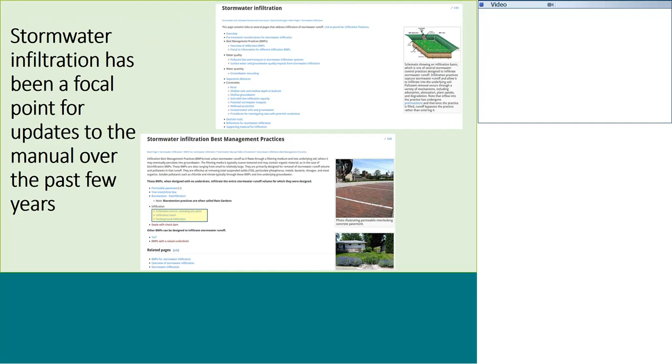There's also a page in the lower part of the screen called Stormwater Infiltration Best Management Practices, and it's the area shaded in yellow that we're going to primarily be focusing on today, and that would be infiltration trenches, basins, and underground infiltration. So we executed a work order. Got to do two things here at one time.

We executed a work order with Barr Engineering to do the following: to provide new information and update existing information on infiltration practices in the manual, with a focus on infiltration basins, infiltration trenches, underground infiltration, and dry wells. This information had not been updated in the manual since the original manual written in 2005. And to ensure consistency between all infiltration best management practices, not just these, but also bioinfiltration, permeable pavement, and so forth.

As I mentioned, our contractor was Barr Engineering. Greg Wilson was their project manager. The top 4 people, Greg, Matt, Michelle, and Heather, did most of the heavy lifting on this, but Barr brought in a lot of people to help at various points in this, and we really appreciate their efforts and work on this.

I'd like to thank our technical support team. With many of our larger projects for the manual, we put together technical support teams. These are people who volunteer their time to review documents, to meet when we have an occasional meeting, and discuss the material as it's being developed. Lois Eberhardt, Jim Hafner, Mike Eisenseat, Karen Jensen, and I believe Joe Mulcahy also pitched in from Met Council. Forrest Kelly, Randy Neprash, and we'd like to thank again those people for supporting this effort.

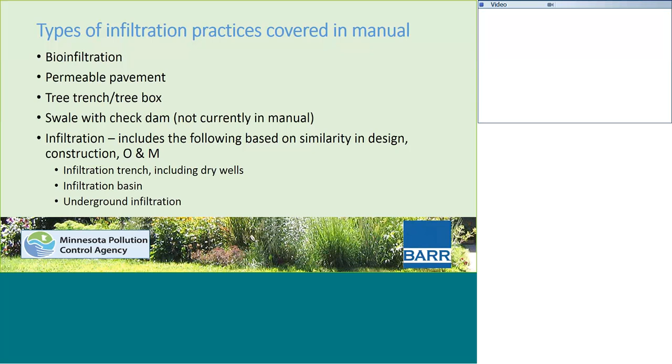As Mike talked about here, we've got infiltration and bioinfiltration. I think there's some things that were brought into this version of the manual that are kind of distinguishing biofiltration practices, those practices that don't infiltrate, from the infiltration measures. And I think I know you wanted to say a couple words about those exceptions.

I just wanted to mention that the bioretention page was updated about 3 years ago with work done by the Kestrel design group, and that page is in pretty good shape, and it was used to kind of help guide us on the infiltration work, which we've really been focusing on since then. So this page has actually been out there for quite a while, but it's the infiltration stuff that we're really focused on with this work order.

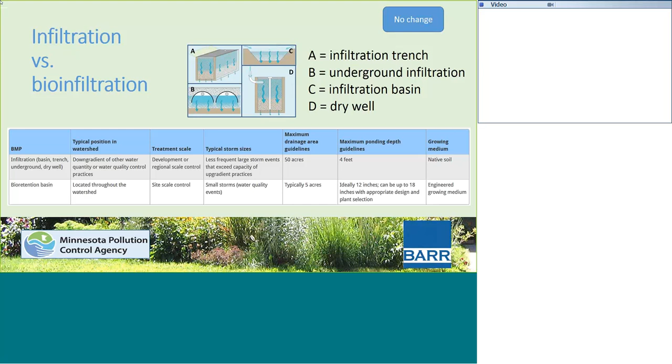Thanks, Mike. I think the other thing to recognize is we have a couple of schematics here in this slide, A, B, C, and D, and what tends to happen with the sections of the manual is that these are utilized consistently to try to provide a visual for how these look different. Okay, and so that is another way to guide your navigation around on the pages on the website. So I think with that, I'll move to the next slide here.

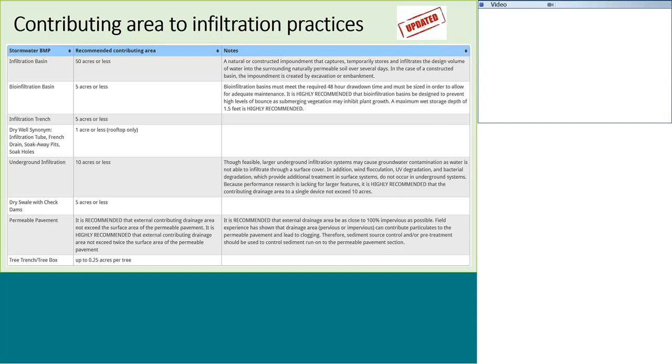If I could just make a quick point here. You'll notice that the contributing areas are all in acres except for tree trenches and tree boxes, and the reason being that we're talking about a tree which needs a certain space to grow in, and so that contributing area is based on the area that tree needs to grow and become healthy and effective. Thanks, Mike. Move on to the next slide here.

Another design element that's taken into account for each of these practices is site location or minimum setbacks. And so we've got different features here vertically or horizontally, whether you're looking at the distance from the high water level, groundwater level, saturated soil, wanting to be 3 feet or more above that, or bedrock. And then also horizontally, how far away you are from a structure. There's some guidance in there for that, 10 feet in this example here, as well as sensitive wells and surface water features, septic systems, slope and karst features.

And so for each one of these elements, in some cases they are footnoted to try to provide more detail deeper in the guidance, and some of these terms are defined as well. One thing that we did revisit, in talking to our technical team, as well as feedback that Mike was receiving prior to work on this study, was that in the past the manual had defined the term bounce. It also provided a definition for water quality volume, and that D-naught term that's in this figure here.

But what our stakeholders were telling us was about the drawdown depth, which is not a defined term, and we did define it here. What we tended to see is the outlet, or the control for any one of these features, a lot of times was creating a lot of extra bounce. And so as a result, it might take a long time for the drawdown depth to get drawn down in like a 48-hour time frame. If that was what was desired in the past, a lot of folks using this guidance were designing things in such a way that the water quality volume would be depleted within 48 hours.

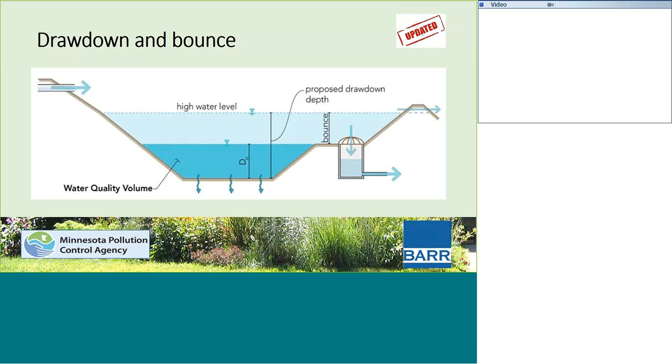And what we heard was that our stakeholders preferred that the entire feature be drawn down within 48 hours, so that if somebody did have pretty high bounce in their feature, you would still have a dry basin within the desired time frame. So this figure is in the guidance and is intended to provide some more background on what's intended when we go in and, for different soil types, define what we think the infiltration rates should be, or in this case the drawdown depth that needs to correspond with that 48-hour time frame.

Greg, if I could just make a point here, I hate to back up, but in the previous slide, it was mentioned about getting the full volume of water out of that system. I should mention that that is a permit requirement. So, great. Thank you, Mike.

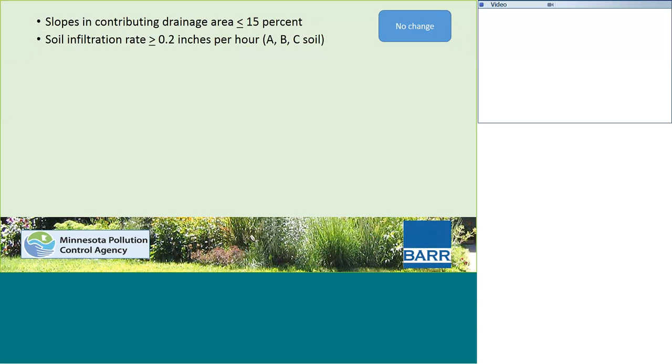So then the other thing is having infiltration systems that do not have an underdrain. If you have an underdrain, then we're really talking more about a filtration practice. Pre-treatment, there is short guidance on what to assume for that. I think this will be a future topic for Mike's group. And yeah, I'm not sure if we're going to make it a topic, but it might be part of a webinar. But the pre-treatment section in the manual has also been updated, and so I would recommend that you go to that section in the manual.

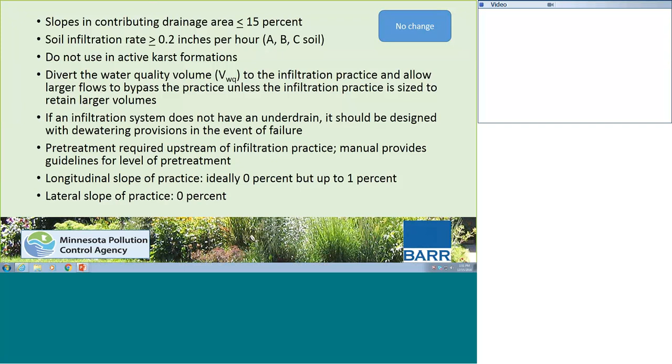I think I'm off the... Okay. I'm going to bring this up.

What we have is a graphic on the left-hand side. Don't expect anybody to see this, but this has been revisited as well. Mike's group through the Minnesota Department of Health have updated the stormwater guidance for sites with drinking water supply management areas. And so this kind of gets at that wellhead protection side of the infiltration practices and what to consider in that regard.

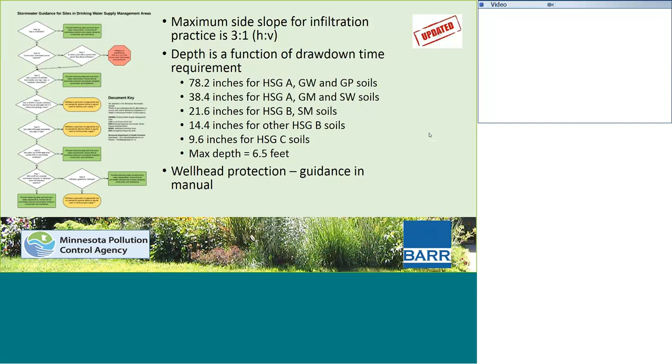I talked earlier about the drawdown time. So we've got maximum side slope practice slope guidance here, but then we also have this individual guidance based on soil type for drawdown time requirements, with the intent being that we wouldn't have a practice that's more than 6.5 feet deep, so that we can make sure it does drain dry. Like Mike said, it's a permit requirement. But if you've got other soils, then the drawdown time requirement is going to affect how deep the maximum depths can be for the various soil types. So that's been updated in this version of the manual.

We also have more information about landscaping and integrating vegetated areas into the planning process, what's recommended for that, selecting vegetation based on their tolerance to water, native plant species and highlighting the preference for that, what types of other vegetation you should consider in these practices, and keeping woody vegetation out of pretreatment devices to not hamper the maintenance of those. Discussion about planting trees along the perimeter and not over underdrains is highlighted, and then using salt-resistant vegetation if necessary.

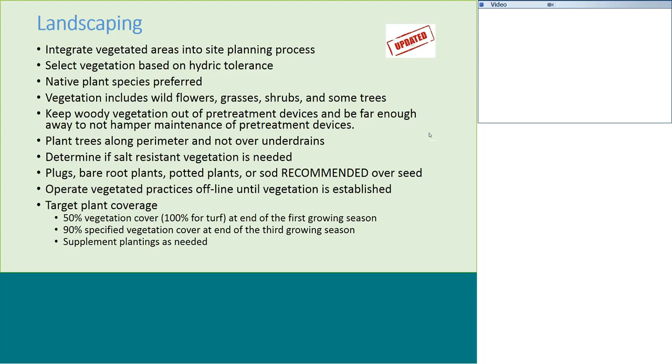So we've got other information that's recommended for plugs, bare root plants, potted plants, or sod. And then operating vegetated practices offline until vegetation is established. There's guidance on that. And then how much plant coverage you should have within different time frames after these practices have been constructed.

Greg, could you just touch real briefly? We get this question a lot on whether snow can be put into these best management practices. Can you maybe just comment a little bit on that and why you're saying rain gardens should not be used for that purpose? Yeah, I think the concern is similar to why we don't want to store much higher levels of water for longer periods of time, in that we're getting more compaction of the soils if we do a lot of snow storage in the practice, or if we have excessive water storage in these practices, and that appears to be affecting the long-term success of some of these practices through compaction.

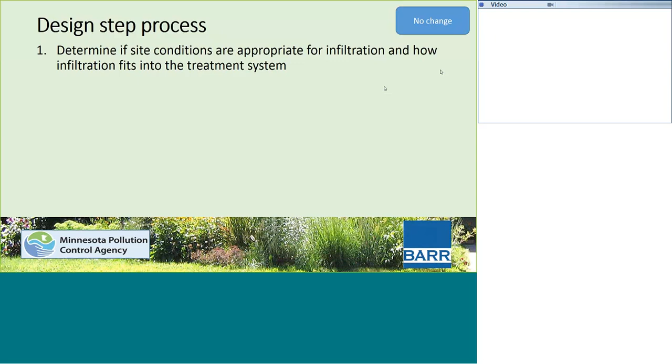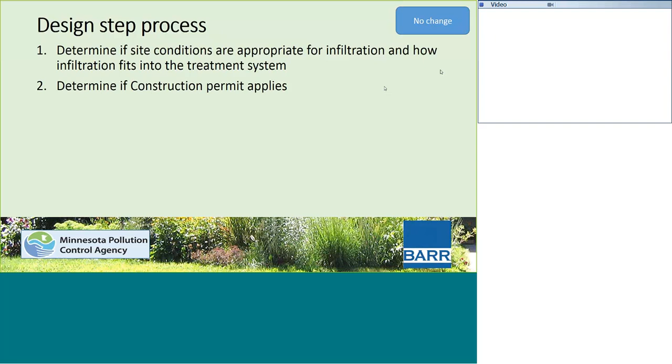All right. Well, I'll try to continue here. Our design step process tries to get people thinking about their site conditions, whether or not it's appropriate in the first place for infiltration, and how that might fit into your treatment system if you've got a treatment train essentially. Determine if you are subject to the construction permit requirements and what might apply from an infiltration practice standpoint. And then verifying your soil properties.

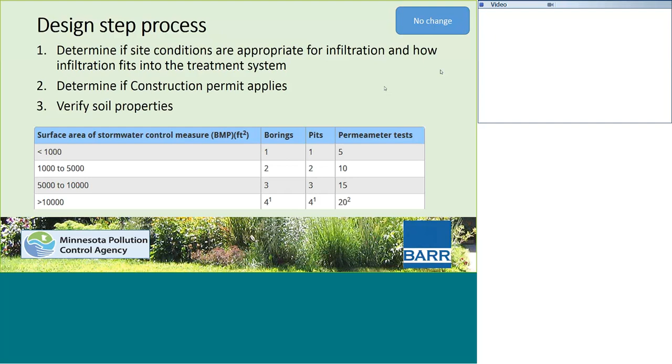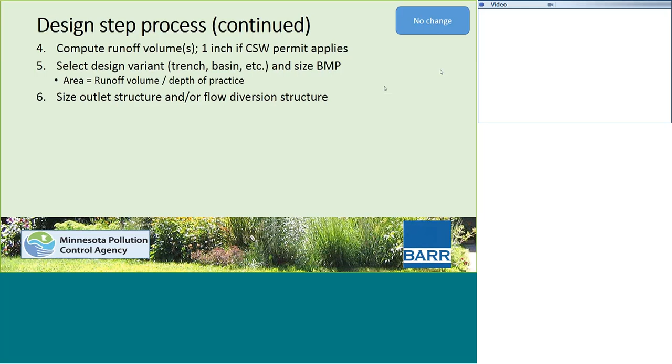The fourth step was to compute runoff volumes, determine if the 1-inch construction stormwater permit applies. Selecting your design variant, what practice are you using and how to size that. Look at your area, your runoff volume and depth that you can maintain or that you can support. How you're going to size your outlet and flow diversion structure so that you can meet that drawdown time that we talked about earlier. And then performing groundwater mounding analysis.

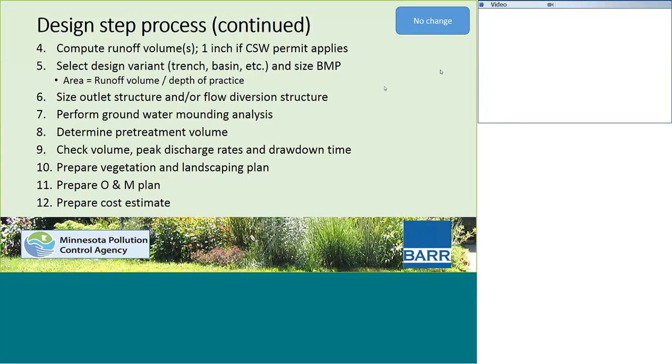I know mounding you were going to talk about later, Mike, as well. There's some more guidance on doing this analysis in the manual, and you might step through that. Yep, I'll talk about that in a later slide. Thanks. And then determining what your pretreatment volume should be is the next step. And checking your volume, peak discharge rates and your drawdown time. Making sure you're within guidelines on that. Preparing your vegetation and landscaping plan and your operation and maintenance plan. And then obviously looking at your costs, depending on where you are in the design process.

Construction specifications was a new element of the manual this year. Try to get more guidance in there about access agreements and adding sections that define easements that might be required, that get you considering what's required in the way of access agreements. Specifications, revisited the construction specifications. Like I talked about earlier, making sure we're getting links to MnDOT specifications wherever possible.

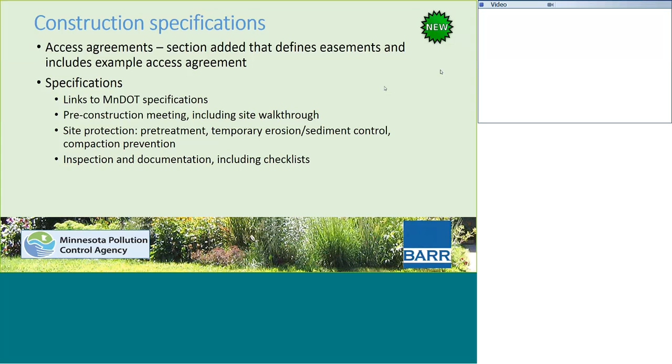Getting you thinking about pre-construction meetings and walkthroughs when you actually do start to construct the practice, and those other things that you need to consider along the way as to the timing of protecting the site, getting your pretreatment in there, your erosion control, and then making sure that the contractor avoids compaction of the practice as much as possible. Inspection and documentation, we include checklists for each type of practice. There's individual checklists for each type of practice to give you guidance on what to look for as you inspect and document the construction of the practice.

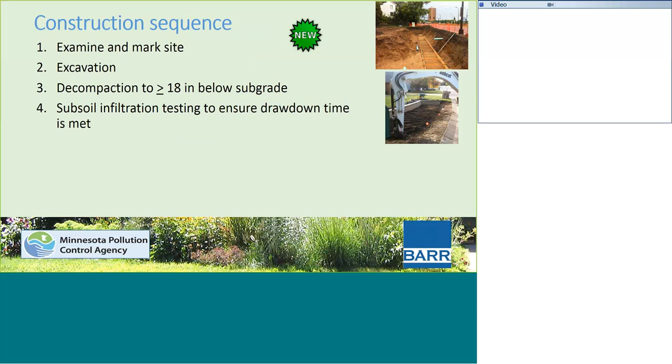New this year is getting construction sequence information in there about examining and marking your site and laying it out before you start construction. What to follow and best practices for excavation and decompaction if you need it, if you do tests and determine that you need that. Things that you can do to do that down to an 18-inch depth below your subgrade. Subsoil infiltration testing to ensure that your drawdown time is met. And then the installation of the materials and media. Best practices for that and restoration and planting, as well as what guidance you might want to consider for stabilizing and closing out your project.

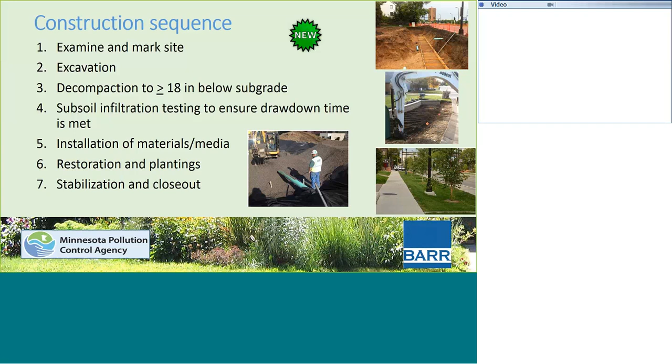So here our next step in the process of updating the manual material is to consider the design and construction phase considerations. Maintenance burden: we've determined that the maintenance burden can be minimized by considering these design criteria. Limiting that drainage area to the BMP, like I said, that varies depending on which practice you're talking about. Providing the site access that you know you're going to need in the future, as well as pretreatment, and then what kinds of native plantings to utilize.

And then inspections during the construction process to ensure that your infiltration practices are built with the approved standards and specifications.

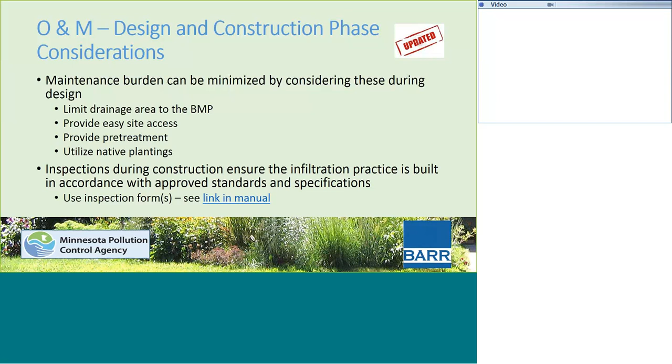Should we go to the link in the manual for that, I guess? On here? Yeah, go ahead and give it a shot. That's what you want, right?

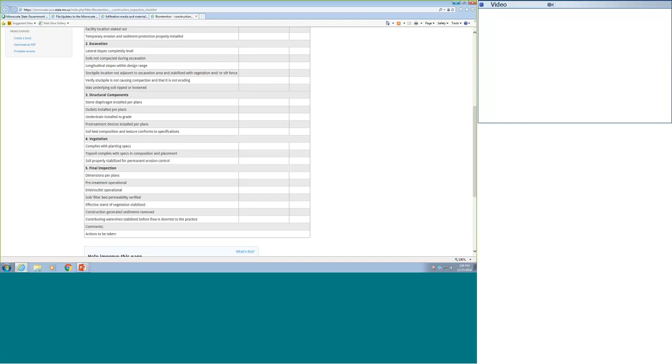What structural components you want to document, as well as the vegetation and making sure that you're meeting specifications on that, as well as the final inspection and closeout of any given project.

And we've got post-construction operation and maintenance considerations. So these have been updated as well in the manual, and revised maintenance plans now include inspection and maintenance checklists, operating instructions for the outlet component, and then your maintenance schedule for vegetation. We have also provided some examples of legally binding and enforceable maintenance agreements. I think we had at least 3 of those in the manual from different entities here in the area that have a lot more experience with these practices.

What's important in these agreements? So there's a few examples to consider in there. And then making sure that you have adequate access and are avoiding compaction, and like we talked about earlier, snow management, those considerations are highlighted, as well as maintenance activities in your schedule. You've seen that before, though, right? So the typical maintenance regime has been updated.

If vegetated, we know you're going to want to water the plants for the first year after planting. And then as needed, consider weeding and pruning the vegetation, stabilizing your mulch and vegetation, removing trash and debris, and then mowing any filter strips that you might have. On a semi-annual basis, it's suggested that you inspect the inflow, pretreatment systems and filter strip, as well as removing or replacing vegetation as needed. The manual provides more guidance on each of these, and includes some estimate for hours in performing these activities, so you can plan out some of these other factors in advance.

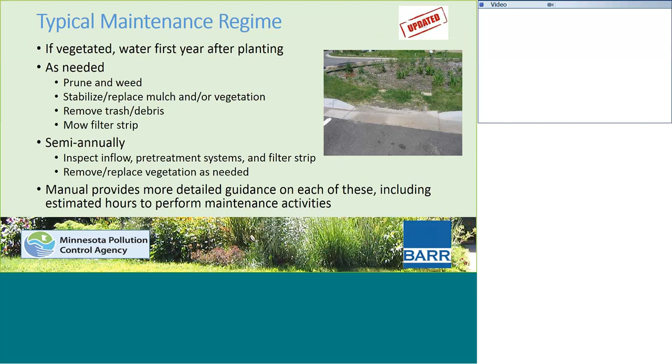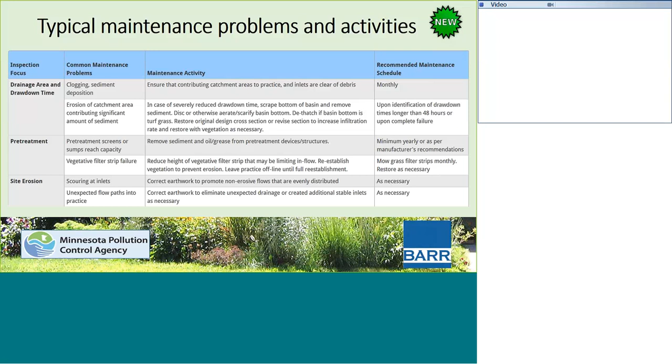So some of the typical maintenance problems have been documented in this version of the manual. This is new information. Depending on what your focus is, whether it's the drawdown time or the drainage area, we've got different maintenance problems that could come up, and so we categorized it by that. Or if you're looking at the pre-treatment portion of the system, or even site erosion following construction, what are the maintenance activities? We've got these individual maintenance activities for you to consider, as well as what that schedule might be for each one. So suggestions on how often to consider each maintenance activity are included in the manual now.

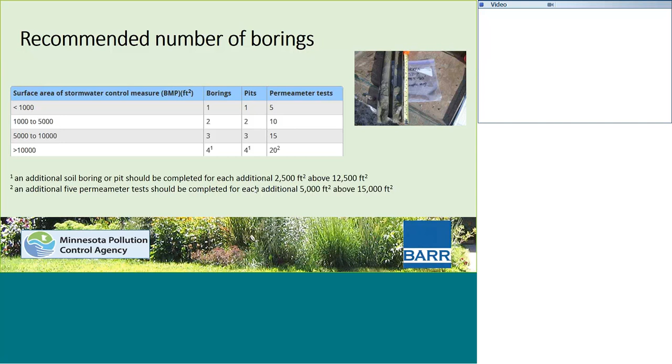Okay. Greg showed this earlier, and I'm not going to spend too much time on it, except that there are a couple footnotes that didn't show up in Greg's table that he showed earlier. That as you do increase the size, there are additional recommendations for the number of borings and pits. So for every additional 2,500 square feet of size, we recommend one additional boring or pit, or an additional 5 permeameter tests for each additional 5,000 square feet above 15,000 square feet. Should also mention that we do prefer in situ permeameter tests to borings, but we realize that borings are typically the mechanism that people use to evaluate their soils.

There are different types, and I'm not going to talk too much about this, but I'll go right to the table, I think. There's one question that just came in about this. All right. So a question came in just now about this topic that Mike's talking about. Is there an example scope of work that would describe what a boring consultant is to gather the required documentation necessary for design of a SWPPP?

Well, for design of a SWPPP, I'm not sure that there is anything for that specifically, but there is definitely guidance in there for the types of information that we believe you will want to collect from your soil boring. So there's actually example boring logs in the guidance, and the kinds of information that you want to collect are included; there's a breakdown of that for each type of boring. Yeah, and we'll walk through that here in the next few slides, and hopefully that answers the question. But there is a tremendous amount of information now that's in the manual on this particular topic, and I think it addresses the question. So we can illustrate that later.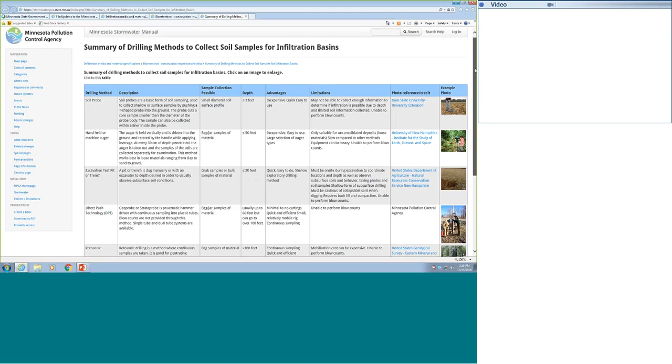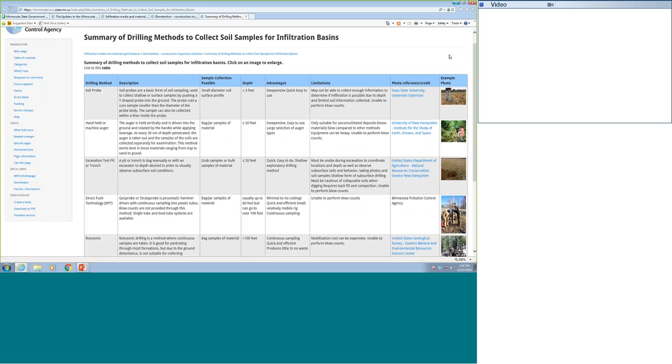There we go. So this discusses the 6 methods for collecting soil samples, soil probes, handheld augers, and so forth, test pits. And this table will give a description of each of those methods. It'll tell you the type of sample collection that's possible, the maximum depth that you can get to using that particular method. So for example, you can't go below 3 feet or 5 feet? 3 feet. 3 feet, I'm getting old. I can't see the screen too well, but 3 feet with a soil probe. I've actually collected soil probes down to 4 or 5 feet when I was much, much younger, and it's not much fun. But yeah, you are pretty limited with that particular method. Advantages and limitations of each method, and then some photos and references that you can go to for further information. So, yeah, if we can go back to the presentation.

Disturbed versus undisturbed soil samples. A disturbed sample does not retain the in-situ structure of the soil. These tests can be used for classification tests. And I talked to Greg about this before, and one of the points that doesn't show up here is that split spoon samples are probably the best methodology for collecting a sample that will give the most relevant information for determining soil suitability for an infiltration BMP, because you can get good blow count information. Correct me if I'm wrong here, Greg. But you use that blow count information to help identify restrictive layers, which is what you're most interested in doing these infiltration tests.

Undisturbed samples are recovered completely intact, and this gives an example of some of the samplers that you can use to get undisturbed samples. They're generally not collected when trying to determine infiltration potential because they do not allow for blow count information, which helps you identify those restrictive layers in the soil.

There's another question that came in. What is the general thought of infiltration in areas that are in active karst features, less than 50 feet of soil cover, but not located in the DWSMA or wellhead protection area? I've heard the term higher engineering review to determine if infiltration can be done in karst areas, but what does the higher engineering review actually consist of?

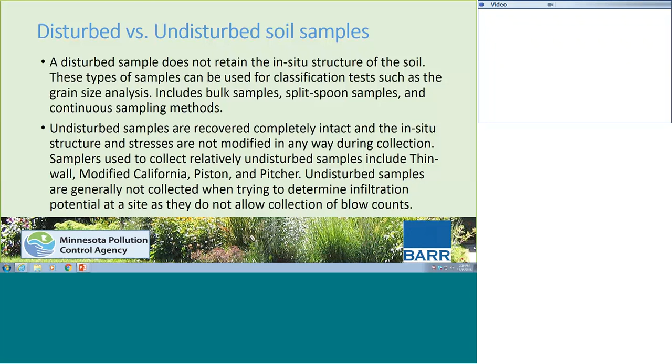All right. Drilling guidance. This is a long slide with a lot of bullets and small text. I apologize for that. But again, we think this is a pretty important topic because your infiltration system is going to perform only as well as the information that you use to design it in the first place. So collecting good soil information is critical.

If recovery in a split spoon sample is less than 6 inches, drill 2 feet deeper and perform another split spoon sample. If a confining layer is found or there is low recovery in a split spoon, reduce your sampling intervals to every 2 feet. What we're trying to do is really characterize that restrictive layer, because that's going to be the dominant layer affecting your infiltration.

If low recovery is encountered, explain this in the field notes and explain why the driller thinks it's happening. Sometimes you can't avoid low recovery, but you need to know that you're getting low recovery if that's the case. Blow counts found using a standard penetration test are critical to determining the presence of restrictive layers.

If soil boring auger refusal is encountered prior to the depth desired, offset about 5 feet from the borehole, drill down to the refusal depth and continue drilling from that point. This will increase your costs, but again, this information is very important. If you continue to get refusal, talk to an engineer. Don't talk to me. Talk to an engineer and try to figure out what's going on, and at a minimum, describe that in your field notes and in the boring log.

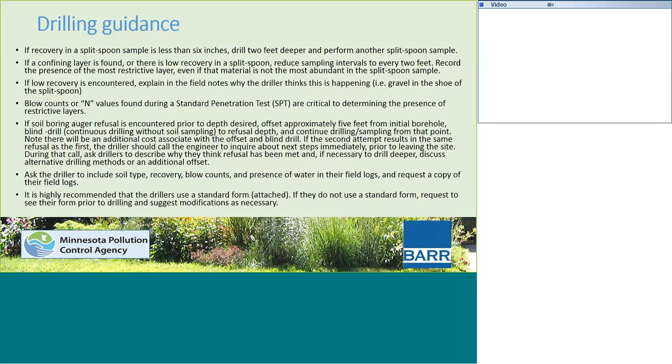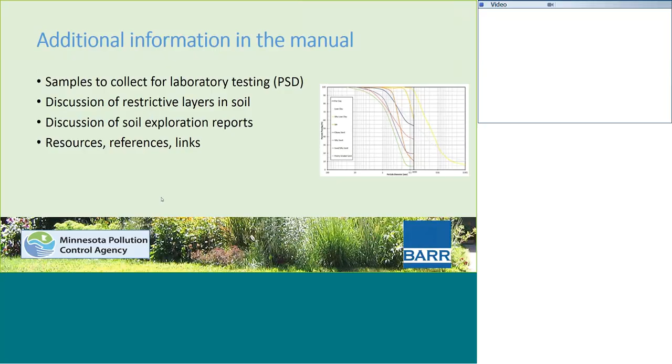Yeah. Greg had mentioned we now have a full page in the manual on groundwater mounding. If you're in the manual and you hover up in the upper right, you see page contents. That will show you the table of contents for that page. Mounding has always been in the manual since the original manual. It's been recommended that you do a mounding analysis. I've talked to some of our engineers here, and they almost never see this actually done.

In practice, it's pretty easy to do a mounding analysis, and this page would be a very useful tool for you if you haven't done them before. The USGS has put together a very simple spreadsheet in Excel format that's accessible, and the link is on this page here that you can use to conduct a mounding analysis. This page will tell you when groundwater mounding is a problem.

So for those of you who aren't familiar with groundwater mounding, when you infiltrate water, you're going to raise the height of the water directly below that infiltration system temporarily until it disperses laterally within the underlying groundwater or soil system. And so that's the mound that's developing underneath.

When should you do a mounding analysis? How to predict the extent of the mound, that's the USGS tool I alluded to. A guide to using that calculator with some examples and various different scenarios and some actual case studies. So the mounding information in this is very useful, and we really recommend that folks start doing that when possible.

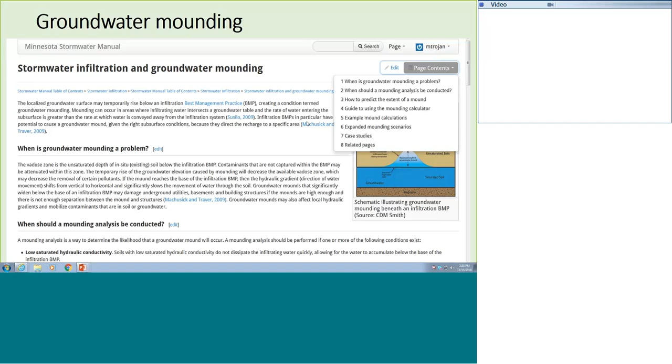Another page that was added to the manual, so I'm kind of done with the boring stuff now. People would say I'm always boring, but

So if we can go back then quickly. We're always looking for good case studies. If you have some, please contact us and we can discuss them with you. We'd like to get more case studies, and we're always looking for good photos too, of stormwater management practices, that is. We're not looking for photos of individuals. So send them to us, good photos with the proper crediting for the photo.

So I think with that, it might be a good time to answer another question. In the chat box: does the manual address infiltration in D-soils as required by several watershed districts? As Greg showed in one of his bullets earlier, infiltration is generally not recommended in D-soils. Is that correct? It is not, but there is guidance that gets at that. I think they have a place for it in one of the bullets there. But yeah, it definitely is not normally recommended.

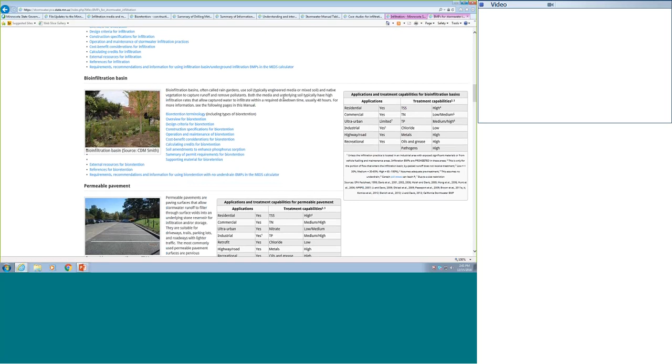But if you went to any one of those BMPs, there's a short description of it, links to all the information, the other pages on that topic. So for infiltration basin, you can get to the overview, design, construction, O&M, and then a table over here that shows you its applicability and its treatment capabilities. And so that would be the case for every one of these infiltration best management practices, the same type of information. Bioinfiltration, for example, same type of table, but different, I'm sure, than the other practices.

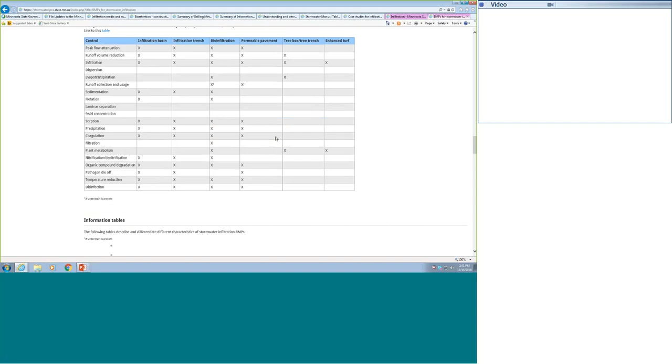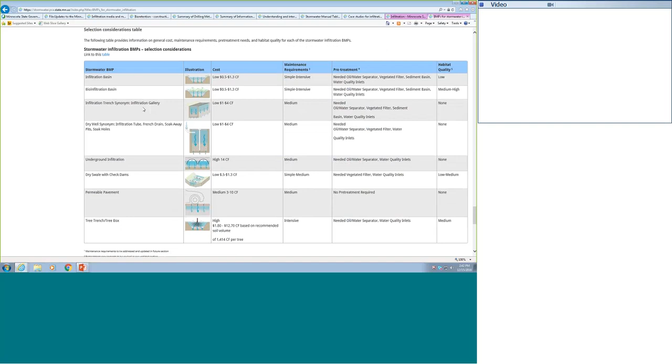You scroll down to some of the information tables. Now, this is the stuff that Greg showed today in the presentation. This is where you find it. A lot of the design, all of the design stuff is on the design page. So here's that table providing the general overview. The table providing the contributing drainage area. The table providing some of the treatment properties. Table providing some of the cost information. So this is where that question had come up earlier about cost, and this is where you would find that cost information on this page here.

Design criteria page is very long, as most design pages are in the manual. Covers terminology, some CAD images and details. Then it goes through the major design elements, whether it's physically feasible at a particular site, do you have the right soils, the topography, and so forth. Major design elements considering the practice and site consideration. Do you need underdrains? What kind of pretreatment do you need? What kind of landscaping do you need? Material specifications, observation well, the surface cover, filter fabric, in situ soils, and so forth. Media specifications, and then the design procedure that Greg talked about, steps 1 through 12.

So again, I'll just scroll down the page real quickly here to show you some of the tables. The table on contributing drainage area. In the manual, for those of you who don't know this, you can click on any image, and it'll give you an enlarged image of that. And so that's a good way to get a good image for these figures without crowding the main page it's coming from. Separation distances, links to wellhead protection that Greg mentioned. There's the image on mounding that Greg showed earlier.

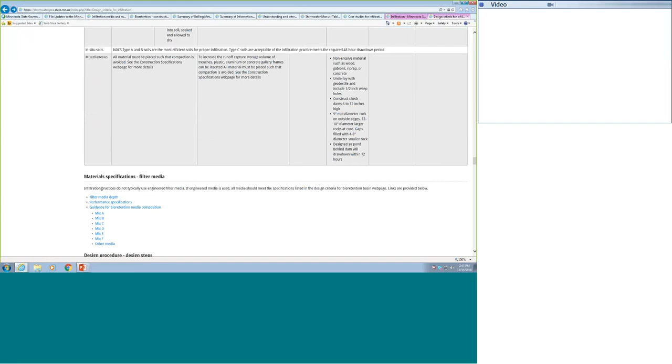So a lot of times in the manual you'd simply be taken to links, which are a single page. Tables, again, I'll point out, are on their own page too. So if you were to click on this, it would take you to the page that holds that particular table. Information on the number of tests to take, and then the design steps here, 1 through 12.

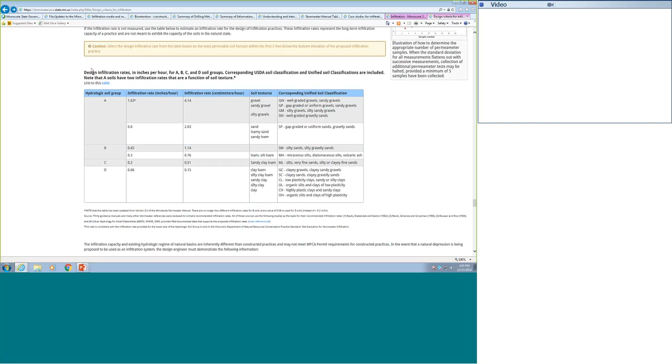The construction page, as Greg mentioned, is fairly new. We did have a construction page in the old manual, but it basically didn't have much of any value. This page is different now. It's been populated with a whole bunch of new stuff.

Construction specifications, pre-construction meetings, how do you protect your site using pre-treatment, temporary erosion, sediment control. How do you prevent compaction? How do you inspect it and document the site? And then the construction sequence. This compaction is a good example of, you'll see that there's one sentence basically telling you to go to this page here, which is a whole page in the manual that deals specifically with alleviating compaction from construction sites.

Going on to O&M. When we see something good that other folks are doing, we'd like to link to it. The Chesapeake Bay has tremendous information on maintenance. Again, as a caution here, the Chesapeake Bay materials that provide useful guidance should not be used for compliance with Minnesota permits, but they have very good information on visual inspections and I recommend for those of you that are interested in that topic that you go see their material.

It's very informative. On this page, you'll find information on the design phase, maintenance considerations, construction phase considerations, post-construction operation and maintenance, including inspections, planting, summary of typical maintenance regime. My glasses went bad on me here all of a sudden. Estimated hours to perform the maintenance activities, erosion protection, sediment monitoring, seeding, planting, landscape management, sustainable service life for infiltration and bio-retention BMPs, typical maintenance problems and activities, maintenance agreements, inspection reports, and then related pages.

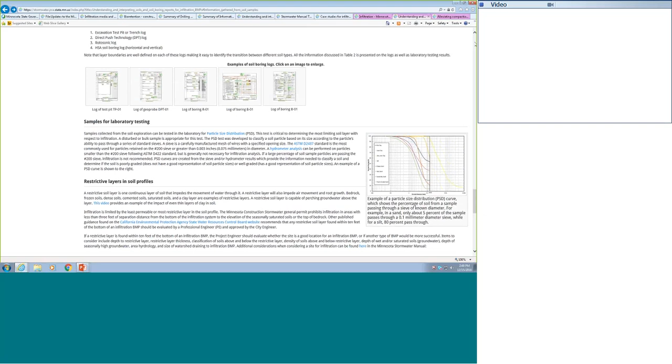Remember what the blow count stuff was? Yeah, and I wasn't able to find that. Okay. I think we did have something in there, I just couldn't immediately find it. I think one thing to keep in mind is you could have some of these tighter soils and not necessarily have a high blow count, and so depending on what it is, it may or may not be a good indication of your infiltration potential in some instances.

So, well, here on the table it talks about blow count, says the number of hammer blows to pound split spoon 6, 12, 18, and 24 inches into the soil. It doesn't really provide a lot of information other than that, so that might be a good note. Maybe I'll try to include some other references, links to other sites in this table, so that you can get at that information. I saw that it was a topic of one of the meetings during the project, and I'll try to go back and find our notes on that. Yeah, and whoever had that question, if you could just send either myself or Mike an email, we can be sure and get you more information about that.

I'm going to go to the karst thing real quick. Okay, go ahead. The karst issue had come up earlier. I just want to show where you can find that. Here's a topic called stormwater infiltration. A whole bunch of stuff on stormwater infiltration, including the mounding page that I talked about. The wellhead protection page is here, but also is the page on karst. And so that is where you go. It's called karst, and that provides you information about why is it a concern, how it's defined, how to investigate the site, and then some general management guidelines. If you go to that site, that should be able to answer the question that you had earlier.

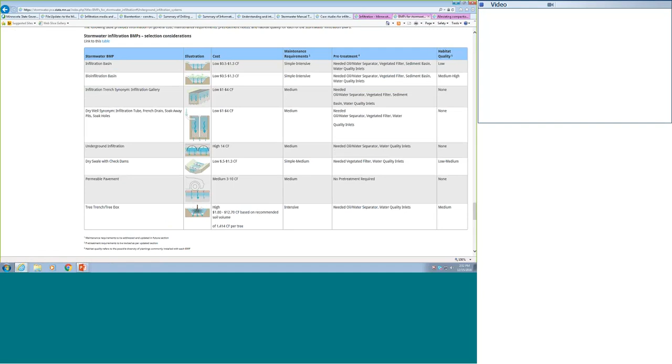information here, most of the tables that were constructed as part of this work order will show the different BMPs here, and underground infiltration called out as a separate practice, so that would be the place where you can get some comparisons. So the design page, for example, let's see if I can find it quickly here. If you go through the material specs, you'll see that sometimes it calls out underground systems where there are differences from other systems. If you don't see differences, then they're essentially the same information between the different types of practices.

If you go to this table, though, you'll see underground infiltration at the top here, and this will allow you to see the differences in design criteria and material specifications for underground systems. Basically the manual calls out those places where underground systems differ from the other systems. Otherwise, they aren't specifically discussed. Yeah, I think the pertinent information should be in these tables. There's the specifications table, and another table for design criteria that has a column specific to underground infiltration as well. So, two big tables that occupy significant space here.